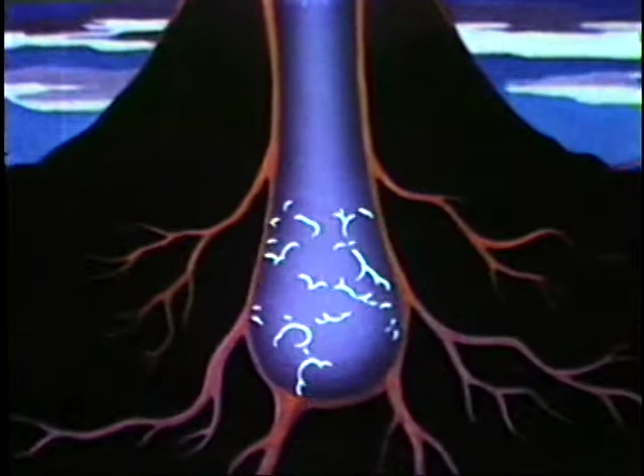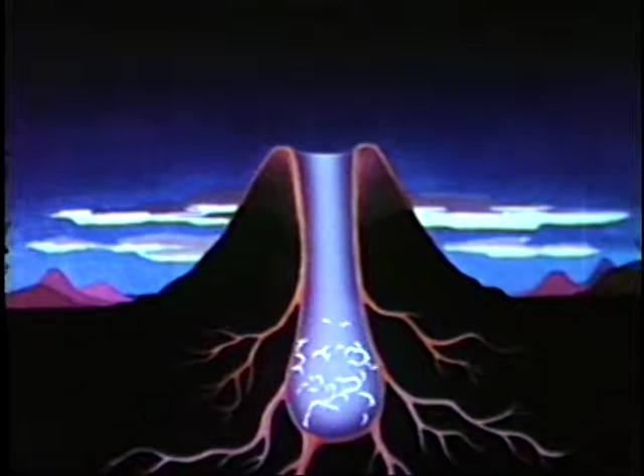As we have seen, combustion occurs in nature on a gigantic scale. Here, far down in the earth, explosive gases have accumulated. When gas burns, it expands. That is, it pushes out furiously for more room, and that push is power. But this is wasted power, power out of control. How could it be made to do useful work?

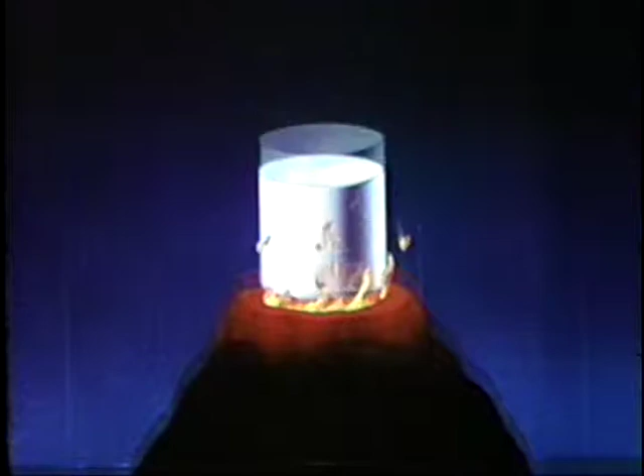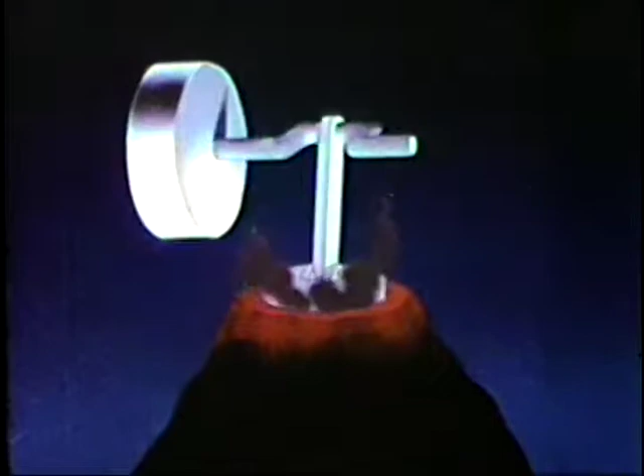Well, if some imaginary giant wanted to control this natural power, he would have to cap the volcano with a huge sliding plug or piston to capture the full force of the explosions. Then he would hitch up a rod to connect the sliding piston to a wheel, thus converting up and down motion into more useful rotary motion.

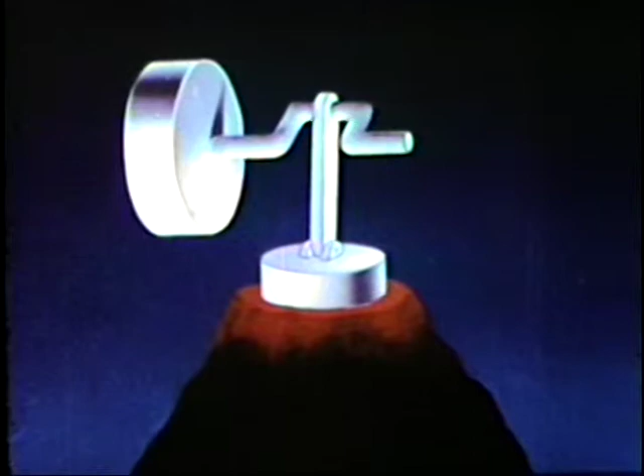Of course, it's not practical to harness a volcano, but if we cut our illustration down to size and then turn it upside down, we can use it to show how an internal combustion engine works by this same principle, utilizing the explosion of air and fuel in a confined space to drive a piston.

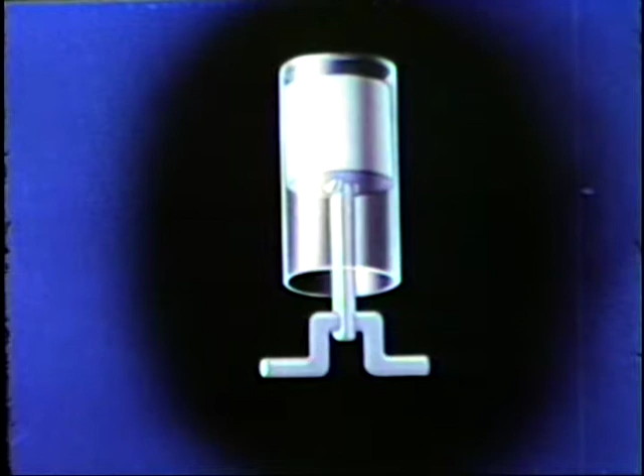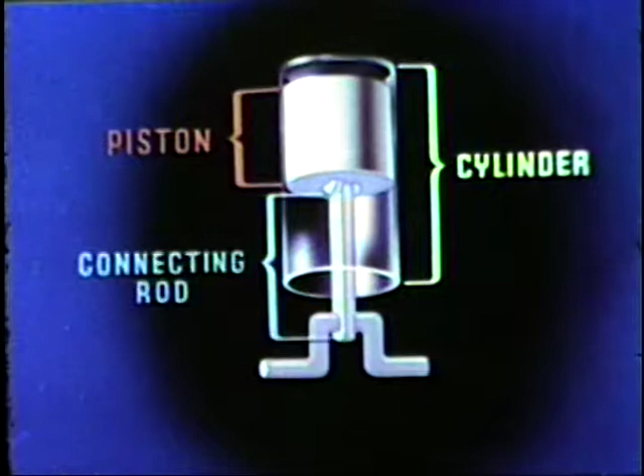Now, by using more practical materials, we have one unit of an engine: a cylinder to confine the force of combustion, a piston to capture these forces, a connecting rod to transmit them, and a crankshaft to convert the motion from up and down to rotary motion. But these mechanical parts are useless without our 3 elements of power: air, fuel, and ignition.

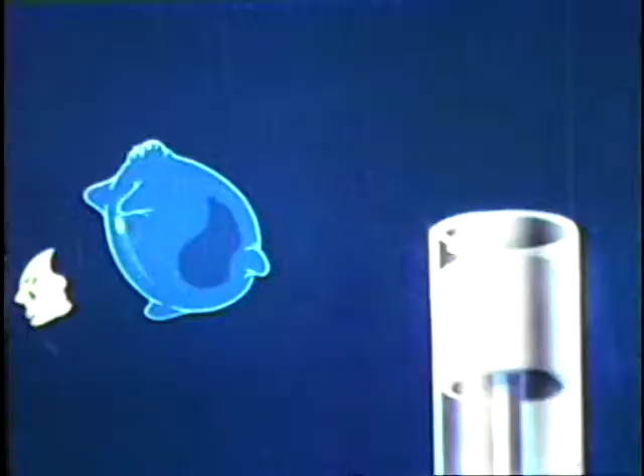If we can get these rascals inside of our cylinder, we can convert this dead pile of metal into useful life. To do this, we first move the piston down to create a vacuum. This draws air and fuel down through this opening in the top. Now they're trapped in the cylinder, and there's no way out.

Next, we move the piston up to squeeze them into a smaller and smaller space, because we know that the tighter they're squeezed, the more furiously they will react. Then, just as the piston approaches the top of the cylinder, we get ready for ignition. Here he comes.

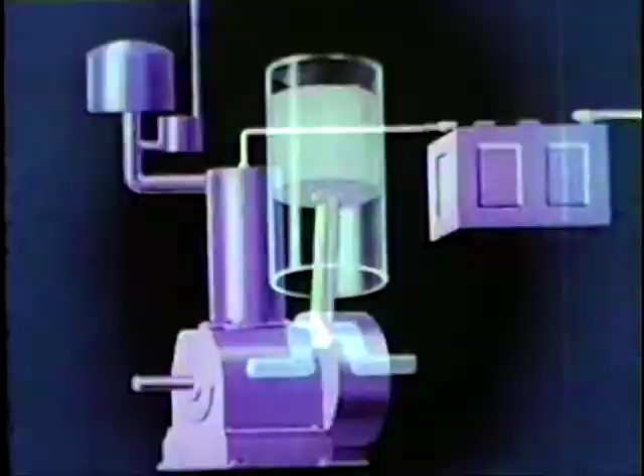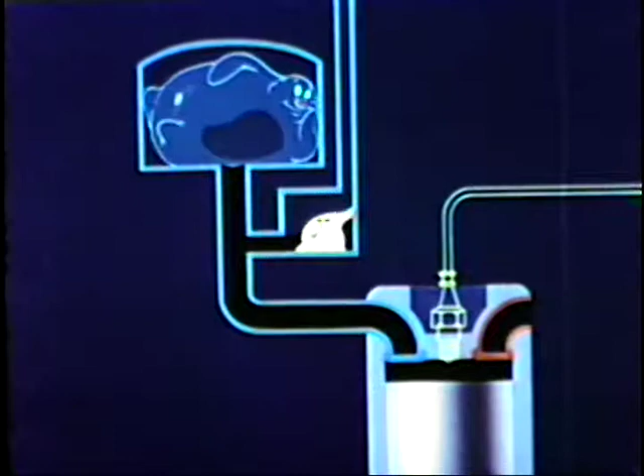This is power under control, in a simple arrangement of a cylinder, a piston, a connecting rod, and a crankshaft. Of course, we get the power of air, fuel, and ignition in different ways in different engines. For example, in the gasoline engine, air and fuel first come together in a carburetor, a sort of meeting room where the boys are mixed together into an explosive gas before being drawn into the cylinder.

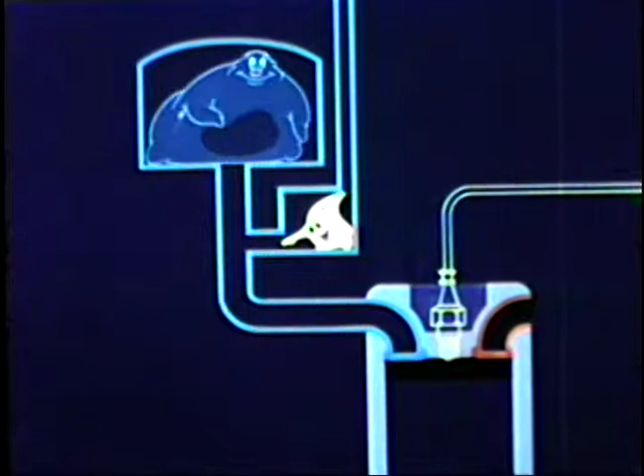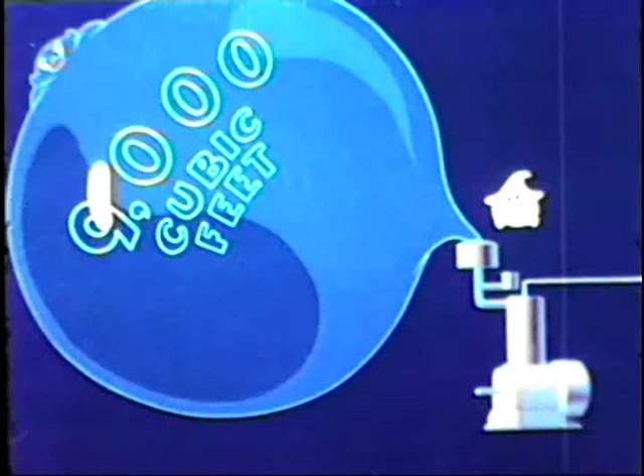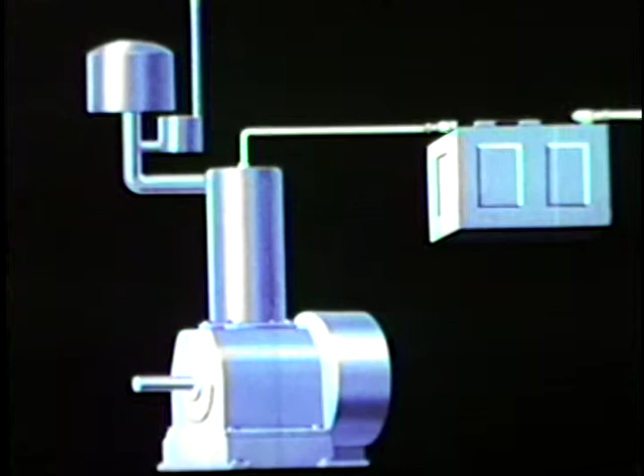Notice the carburetor is a much larger opening for air than for fuel, because our engine needs 15 times more air than fuel, by weight that is. By volume, we use 9,000 cubic feet of air every time we use up 1 cubic foot of gasoline. So you see, air is a very important part of combustion. But remember, to get power from air and fuel, we also need ignition. We keep this little rascal stored up in a battery until we're ready to use him. Hey, wait a minute, not yet.

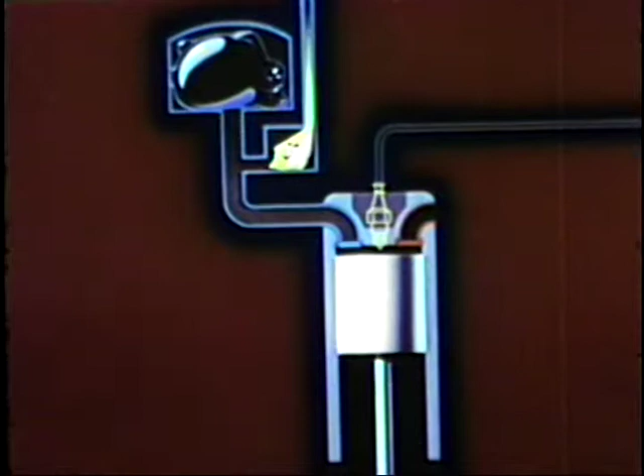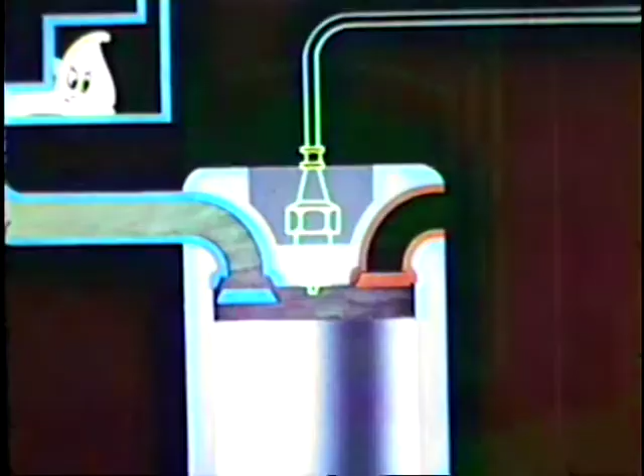Before we show you how we control ignition, we must first show how we control the intake of air and fuel. When this little door, called the intake valve, opens, and the piston moves down, the mixture of air and fuel in the carburetor is sucked down into the cylinder. At the bottom of the piston stroke, the valve closes tight, trapping the mixture. Then the piston moves upward again to compress the mixture to much less than its original volume.

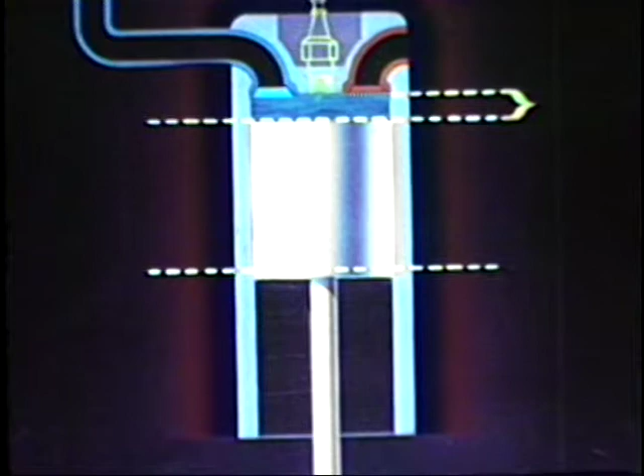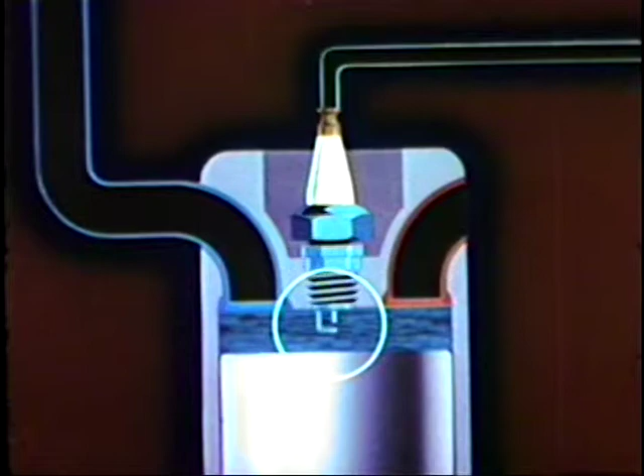Now, when we're ready to ignite these compressed gases, we will bring ignition into the cylinder through this spark plug. Notice how the end of the plug provides a space between 2 points which extend into the combustion chamber. When ignition gets here, he'll have to jump across this space, and that takes the force of many thousands of volts.

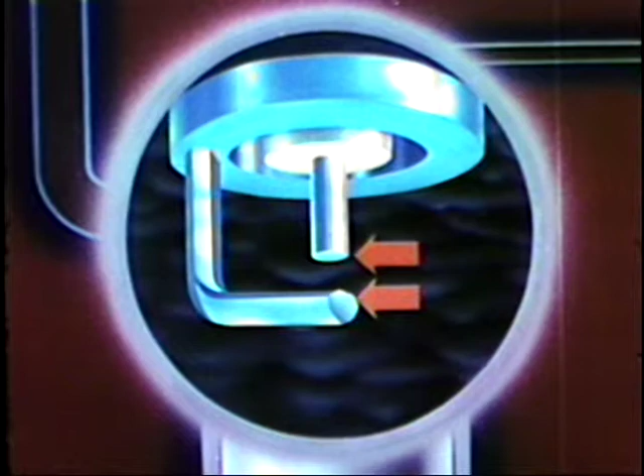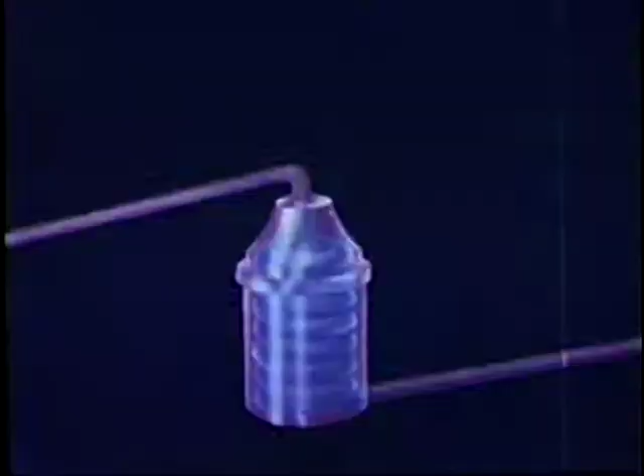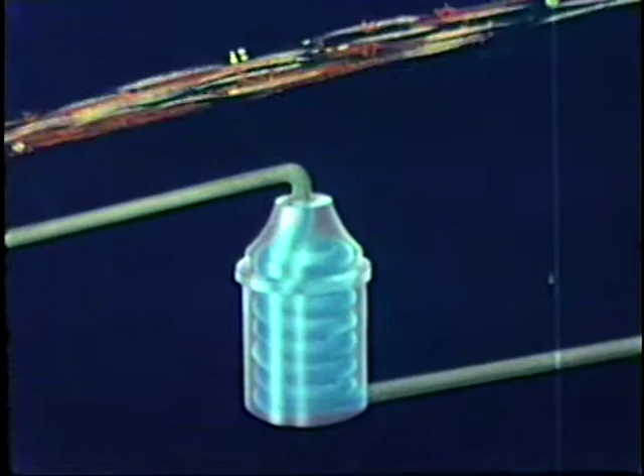But ignition, as he comes out of the battery, is not strong enough for this job. So we have to step up his voltage to give him more force. One part of the method is to run him through this coil. When he comes out here, he's really full of pep and energy. Now we're ready. Okay, ignition, go to it. As soon as air and fuel give us their power, another door, called the exhaust valve, opens to let the piston clear the cylinder of burnt gases.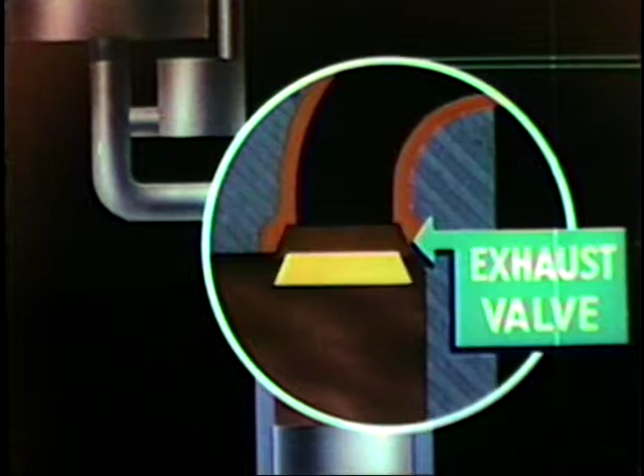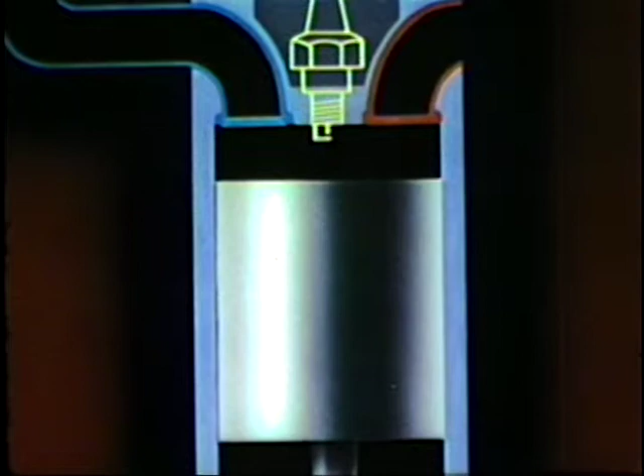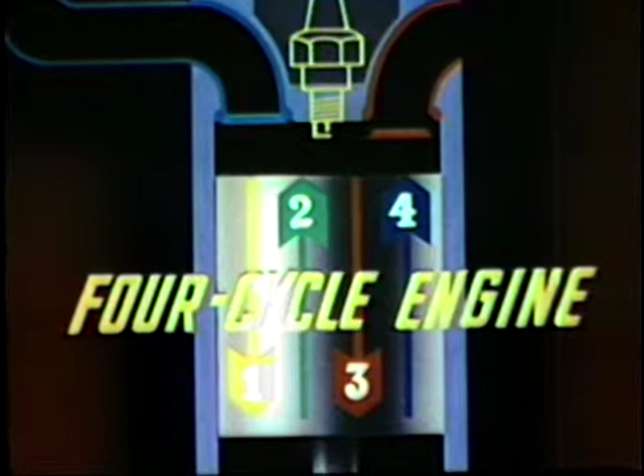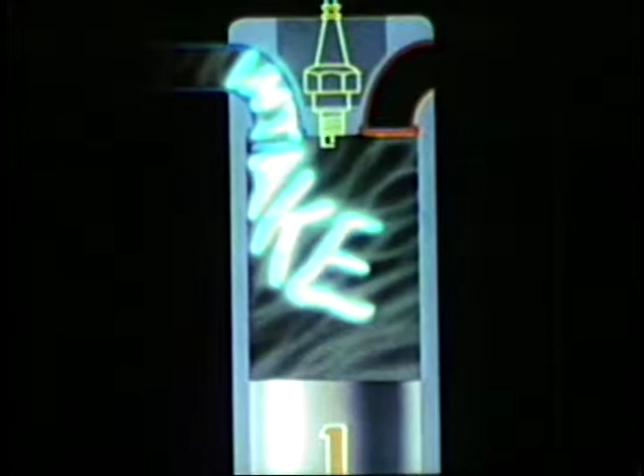So we see that 4 strokes of the piston are necessary to complete 1 power cycle. Down, up, down, and up. Hence the term 4-cycle engine, which simply means 4 strokes to 1 cycle. 1, the piston draws air and fuel into the cylinder. That's intake. 2, it squeezes them into a small space. That's compression.

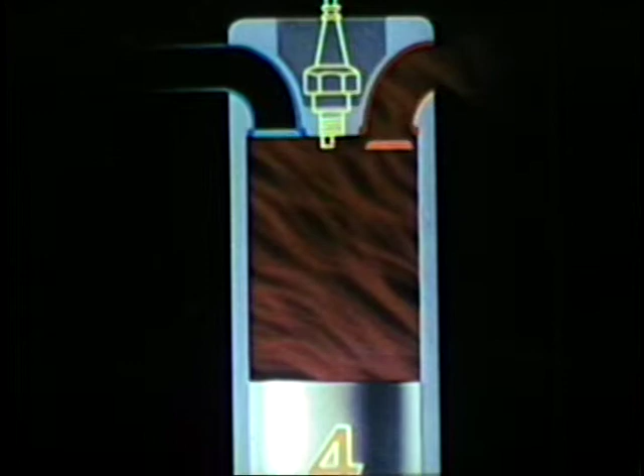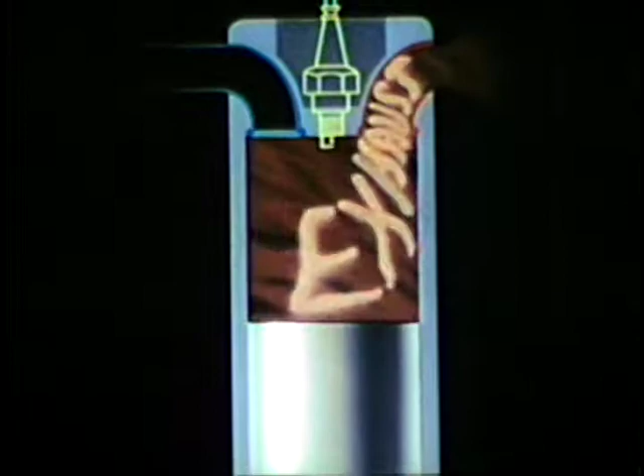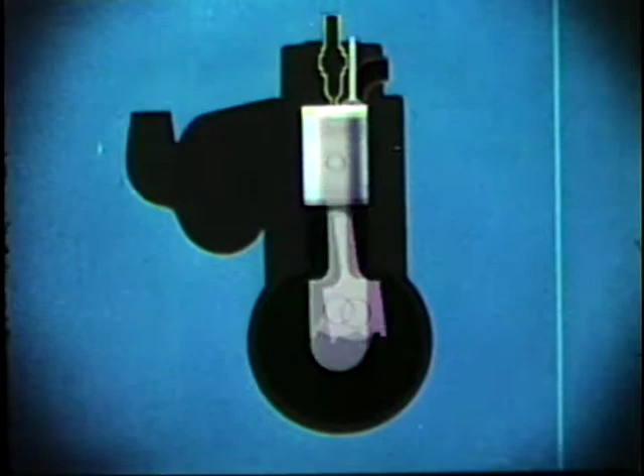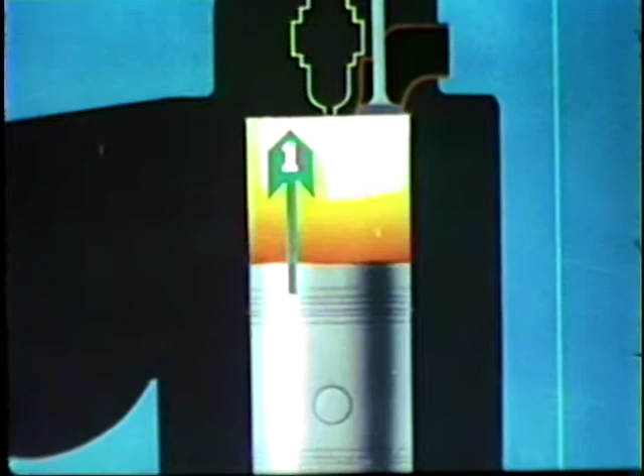3, ignition touches them off for the power stroke. And 4, the piston forces out the burnt residue through the exhaust. Intake, compression, power, exhaust. Intake, compression, power, exhaust. Of course, some engines operate with just 2 strokes to make 1 power cycle. In that case, we have only a compression stroke and a power stroke. In between or during these strokes, we take care of intake and exhaust.

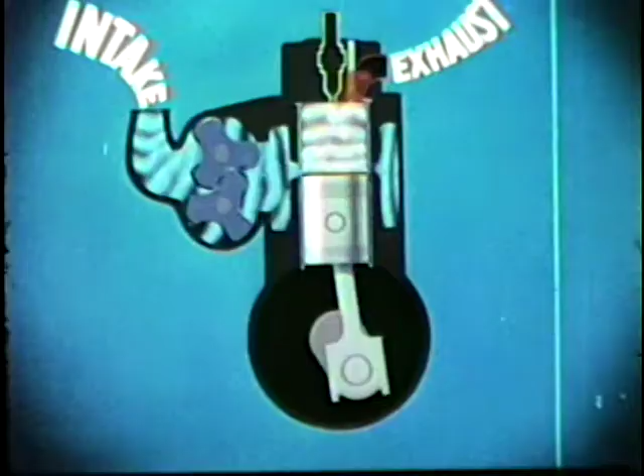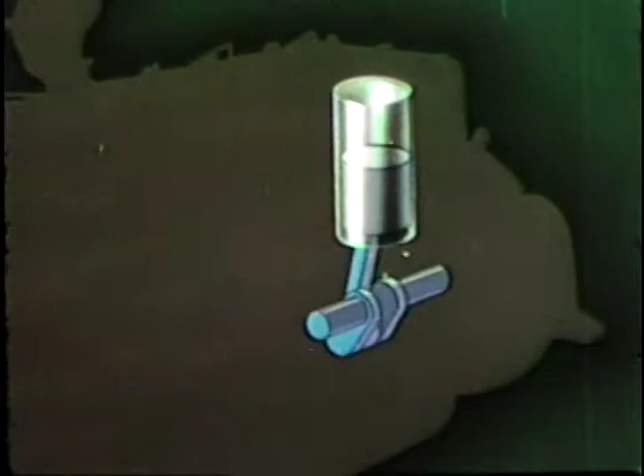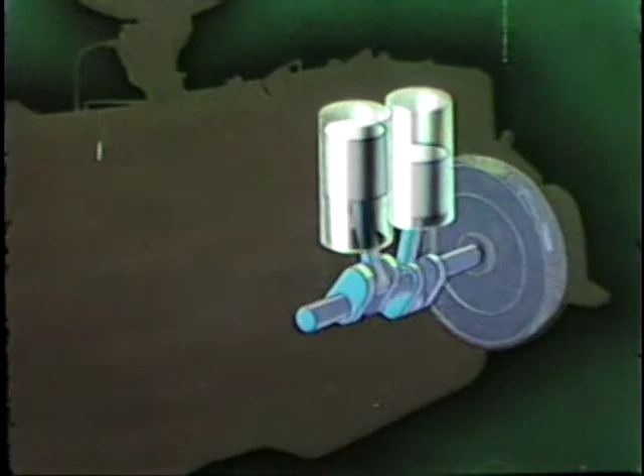But whether we have a 2-cycle or a 4-cycle engine, we must keep the crankshaft turning smoothly between our strokes. So we use the momentum of this heavy flywheel. But to get continuous power, we must fill in those intervals with other power strokes. And so we take our final step. To get the smooth power flow of the modern engine, we simply put several of these one-cylinder engines together and connect the several pistons to a common crankshaft.

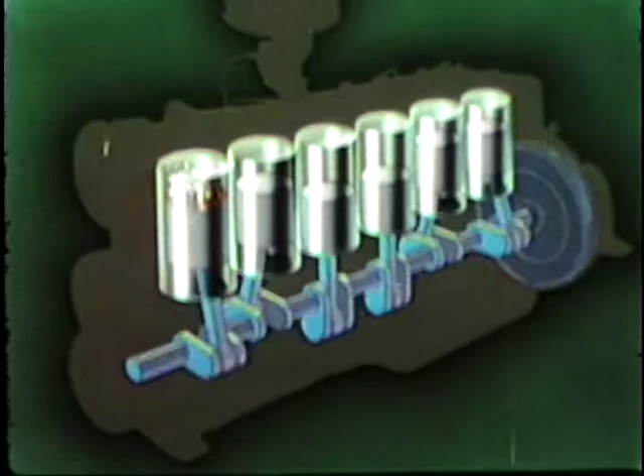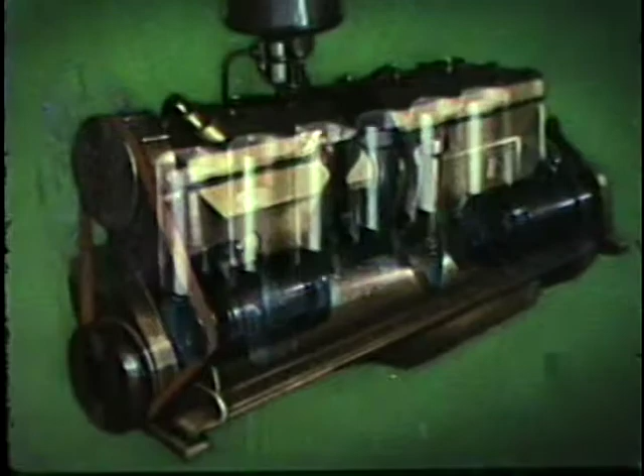With this arrangement, power strokes now occur in different cylinders in regular sequence. Thus, there's a continuous delivery of power strokes to the crankshaft. This is power in harness, power under control in an internal combustion engine. Whether we use an L-head or a valve-in-head engine, this is the power that changed the good old days into a better new day. This is power to multiply our efforts and expand our accomplishments. And the uses for this power are as different as the needs of man.

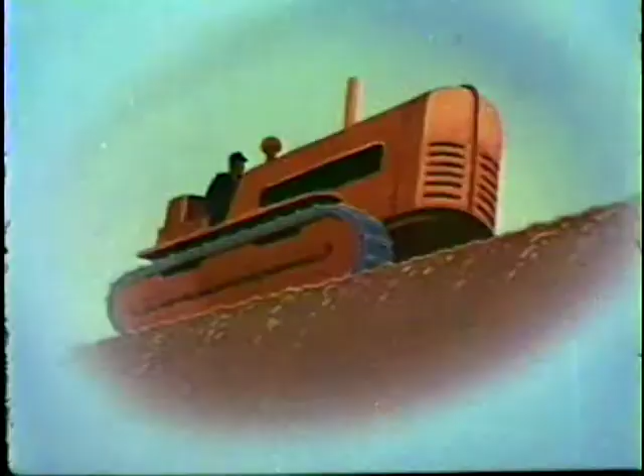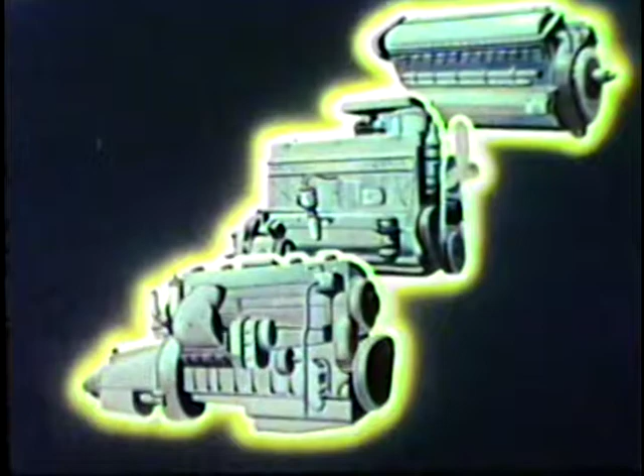But whatever the type of engine, whether gasoline or diesel, on land, on sea, or in the air, they all capture the power of air, fuel, and ignition. Wild, untamed, and destructive in the beginning, but now brought under perfect control to give us the tremendous, useful power of the internal combustion engine.